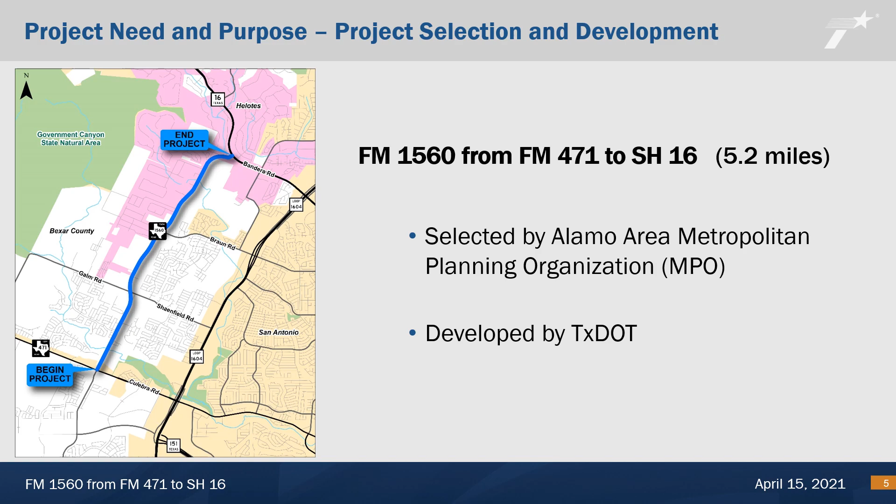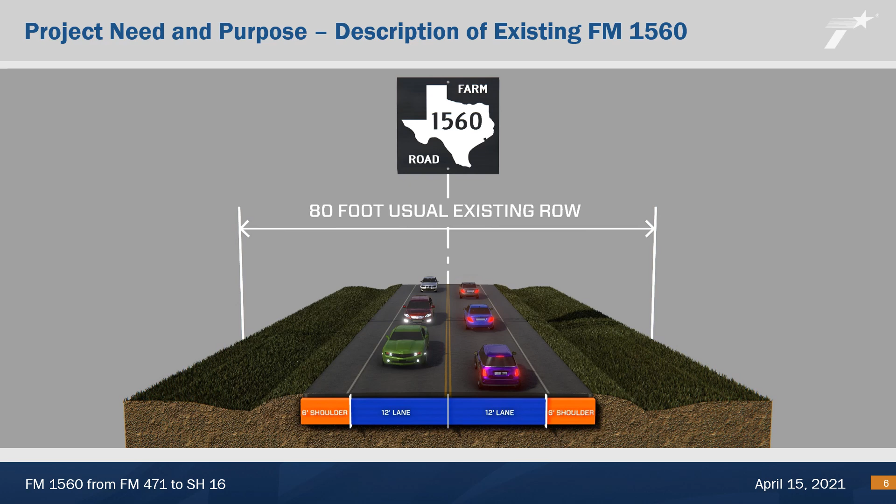This typical section illustrates FM 1560 as it exists today. FM 1560 is typically a two-lane roadway with shoulders. In some areas, the shoulders have been reduced to accommodate turn lanes as traffic demands on the corridor have grown over time. There are no bike lanes, curbs, or sidewalks along FM 1560. There are ditches on the side of the road that carry runoff from the roadway and adjacent properties. These roadway features are located in a state-owned right-of-way that is typically 80 feet wide.

TxDOT calculated the ability of FM 1560 in its current two-lane layout to handle traffic flow based on the traffic volume measured in 2017 and the projected future 2043 traffic volume. The results are presented in terms of level of service and average travel time. Based on 2017 traffic volume of 13,966 vehicles per day, FM 1560 operates at a level of service C, and the time to travel from one end of the corridor to the other averages 9 minutes. Level of service C is an acceptable level of performance. Overall, the roadway performs well at the 2017 traffic volume.

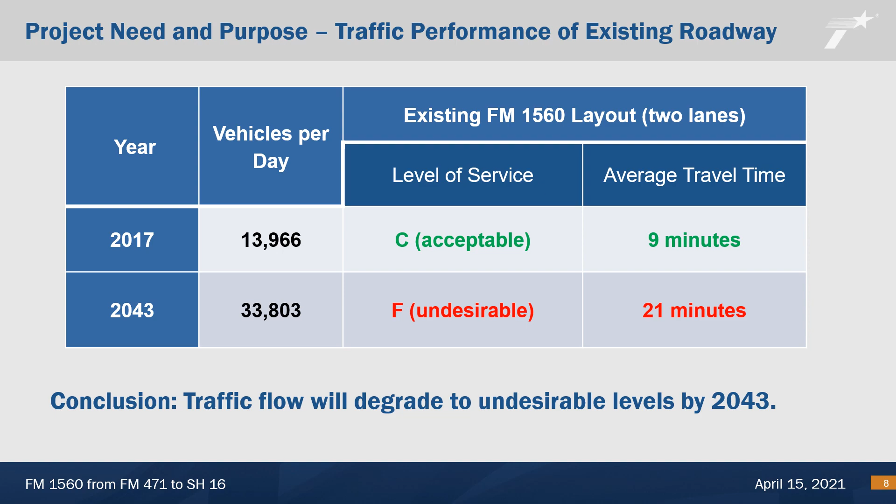FM 1560 was constructed in the 1960s as a farm-to-market road when there was very little development in the watersheds. It crosses the 100-year floodplain in several areas as shown on this map. There are even more locations where the roadway is overtopped, or in other words, flooded, during smaller, more frequent storm events. Where this occurs, the roadway is impassable and a concern for safety. Several warning signs and flood gauges are located on FM 1560.

The purpose of the project is to accommodate projected traffic volumes on FM 1560 from FM 471 to SH 16 at acceptable levels of service and to improve drainage to current design standards to reduce the frequency and magnitude of floodwater overtopping the roadway. In the course of addressing these needs, the project would be designed to accommodate bicyclists and pedestrians and include appropriate mitigation for environmental impacts.

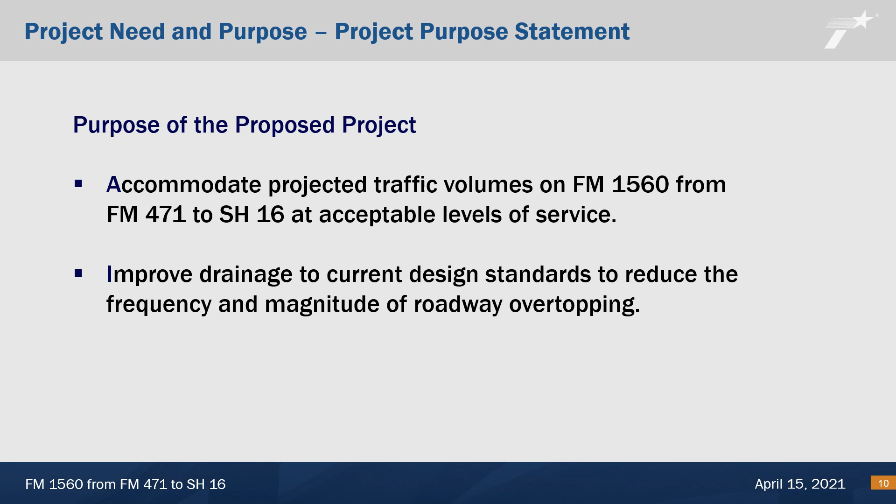TxDOT hired the engineering firm Jones & Carter to develop a project to address traffic and drainage needs, including appropriate public involvement and related environmental compliance studies. Together, we developed a preliminary schematic to address the need and purpose of the project.

TxDOT met with affected property owners, local government officials, and hosted an open house for the general public in January 2019. Based on feedback from these meetings, we revised the schematic and right-of-way needs and coordinated with affected property owners and stakeholders regarding the new design. The resulting schematic is presented in this public hearing for public review and comment. This section of the presentation describes the project with information such as roadway modifications, right-of-way requirements, schedule, and cost.

This typical section illustrates the proposed project, which would expand FM 1560 to 4 lanes, bike lanes, curbs, and sidewalks. The lanes would be typically 12 feet wide. The bike lanes and sidewalks would be typically 5 feet wide and 6 feet wide, respectively. The opposing lanes would be separated by a center two-way left turn lane as shown here, except in proximity to some intersections where a raised median would be used to divide the traffic.

Traffic signals would be maintained at the intersections of FM 471, Galm, Shaenfield, and Braun Road. New signals would be added at Sawyer Valley Drive, and the signals located at Iron Horse Way would be moved to Antonio Drive. The typical proposed right-of-way width is 120 feet. Approximately 36 acres of right-of-way would be acquired to accommodate the proposed improvements. This would expand the state right-of-way from its usual width of 80 feet to 120 feet. The existing and proposed right-of-way lines are shown on the schematic, along with the proposed roadway improvements.

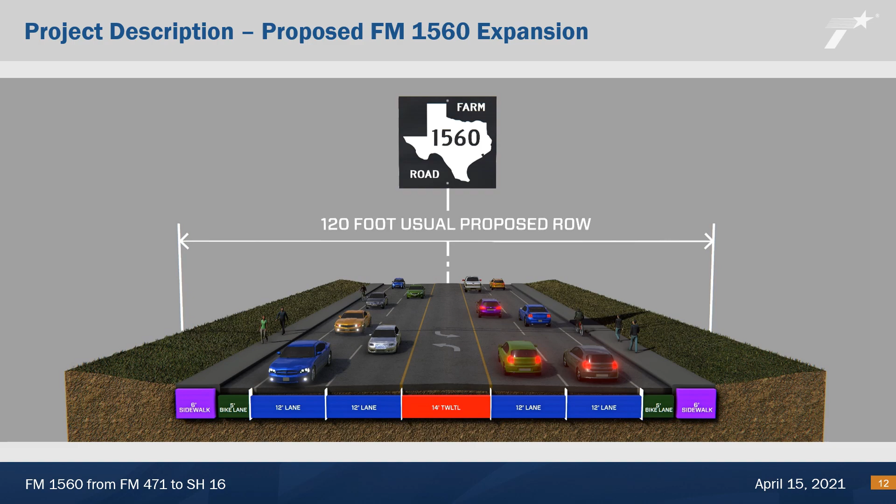The schematic is a detailed representation of the proposed roadway improvements and right-of-way requirements. This image shows the schematic. Since the project is over 5 miles long, it is not practical to show the entire schematic at a reasonable scale in the presentation. We encourage you to view and download the schematic from TxDOT's website at www.txdot.gov. Keyword search FM 1560 from FM 471. The next 2 slides are going to focus on the 2 areas shown in red.

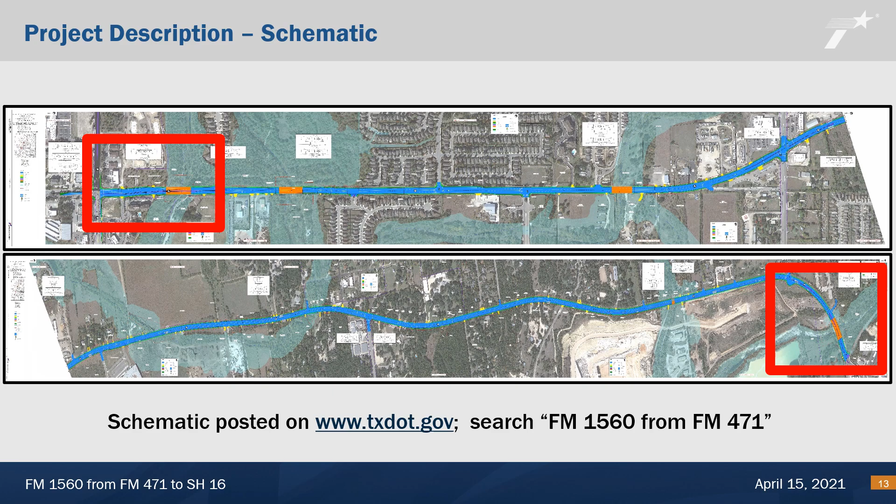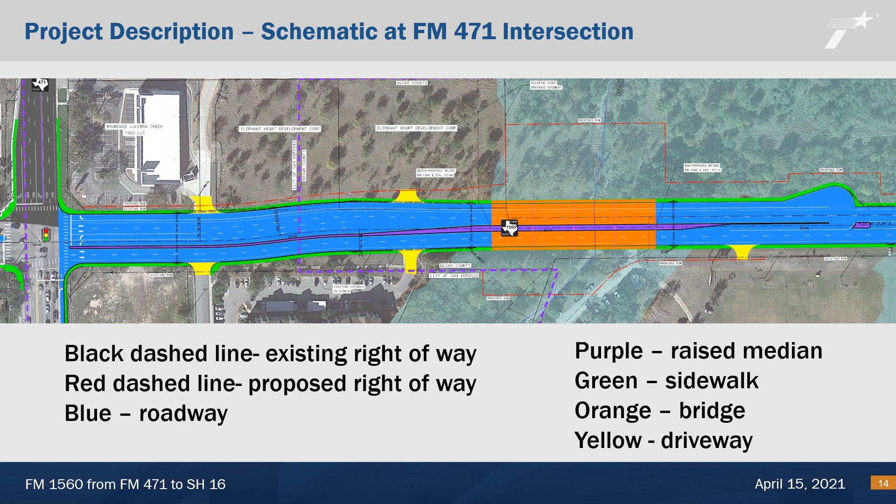layout. Raised medians proposed in this area would prevent left turns from Riggs Road and Iron Horse Way onto FM 1560 and preclude traffic from making U-turns in the curve of FM 1560. The traffic signal at Iron Horse Way would be removed and replaced with a new signal at Antonio Drive, where the traffic signal and loon can accommodate turnaround traffic. The intersections with Antonio Drive and Iron Horse Way would be realigned.

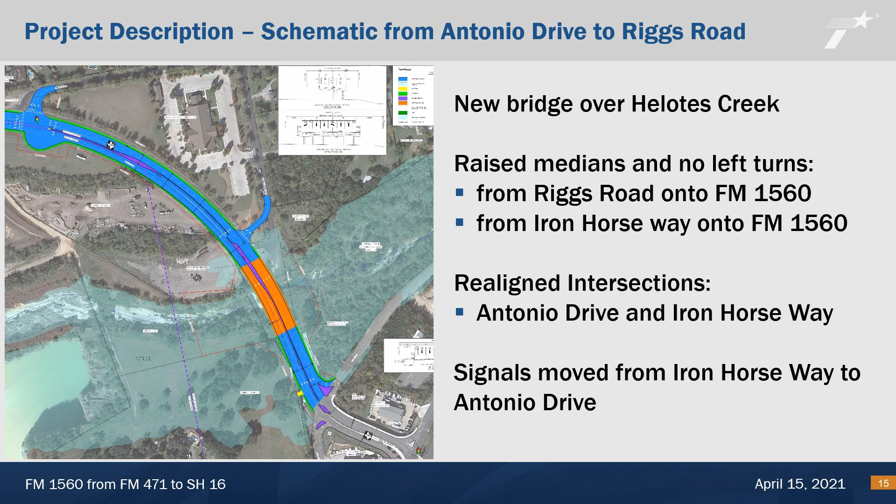Although the schematic shows more detail, we have also prepared a flyover simulation of FM 1560 showing the proposed expansion in video format. This video is posted on TxDOT's webpage for the project and can be accessed using these directions.

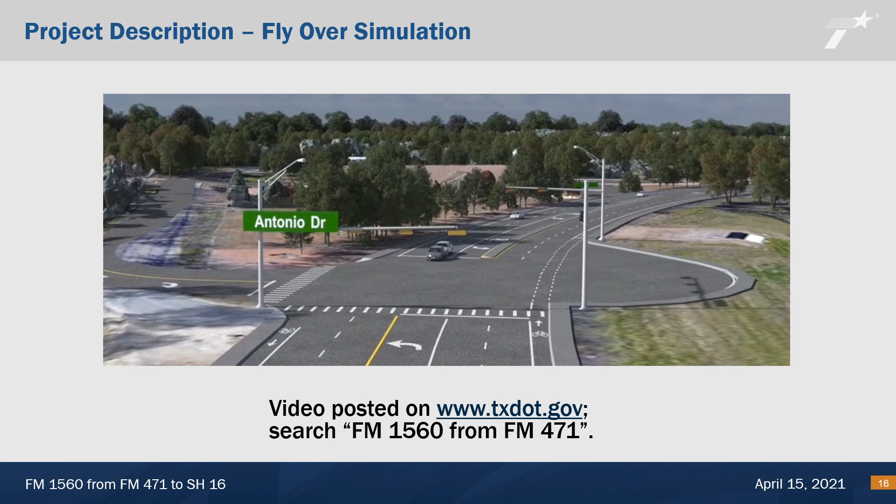TxDOT calculated the ability of the proposed expansion of FM 1560 to handle traffic flow under 2043 traffic volumes. If the roadway is expanded as proposed, it is expected to operate at level of service C in 2043, and the travel time from one end of the corridor to the other averages 12 minutes. These results indicate that the proposed improvements would satisfy the need and purpose of the project.

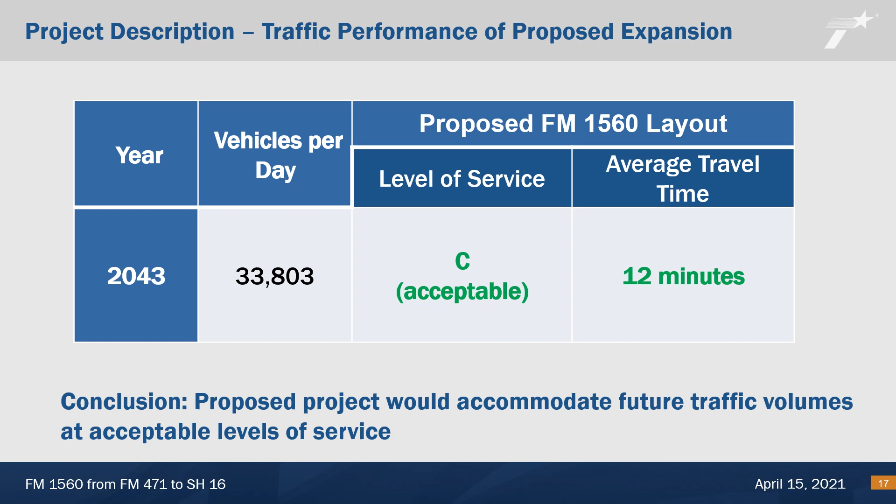This project was designed so that the roadway would remain open at a minimum during a 10-year storm event. This would substantially reduce the frequency or magnitude of overtopping along the corridor, which satisfies the need and purpose of the project. The project would include numerous design elements to improve drainage.

The majority of culverts and bridges on FM 1560 would be replaced, typically with larger structures. This includes new bridges at Culebra Creek and Helotes Creek, and culverts in overflow sections where there are currently no structures at all. The project would also include underground storm sewer and underground water treatment controls to remove pollutants from runoff to protect the Edwards Aquifer.

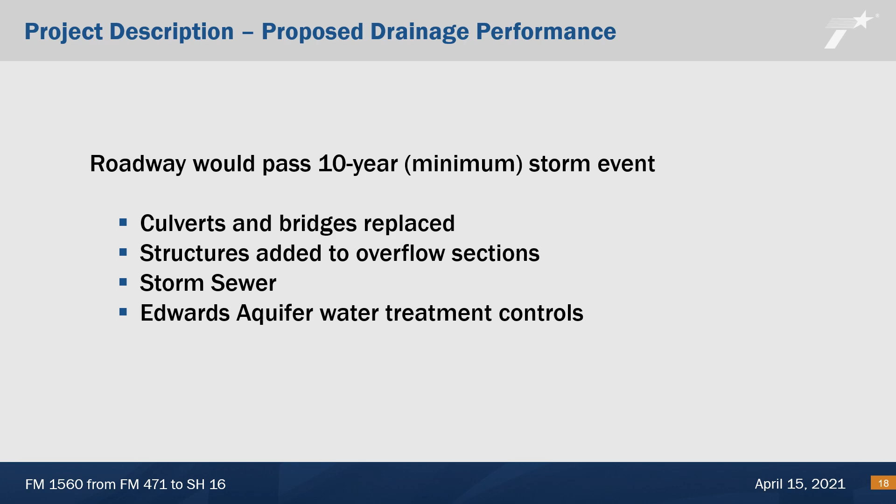The project would be constructed in phases in accordance with the Metropolitan Transportation Plan and the Transportation Improvement Program. Phase 1, which includes FM 1560 from FM 471 to Galm-Shaenfield, is currently planned for construction in 2022. Phase 2 from Galm-Shaenfield to SH 16 is planned for construction in 2023. The total project cost is estimated at $62,600,000, which would include federal and state transportation funds.

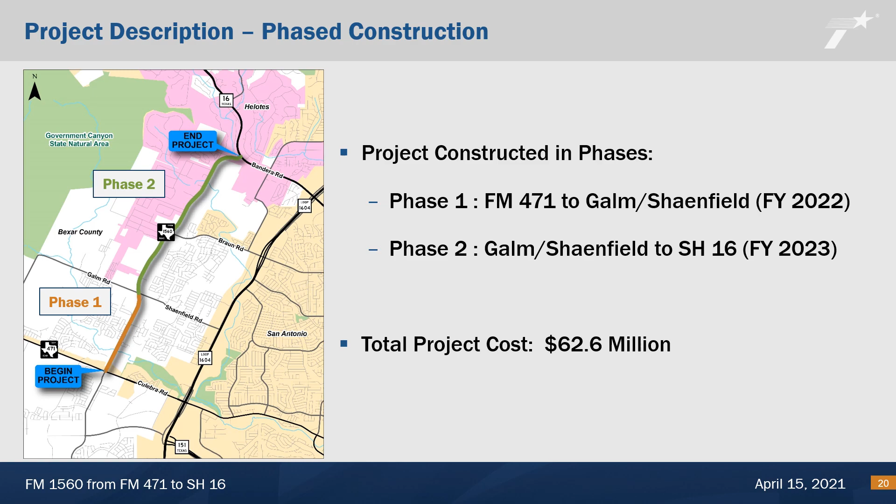The project would require the acquisition of approximately 36 acres of land from 89 parcels as shown on the schematic. We do not anticipate that any homes or businesses would be displaced by the project. On the schematic, existing right-of-way lines are shown by black dashed lines, and proposed right-of-way lines are shown by red dashed lines. If you review the schematic and see red dashed lines on your property like those shown on this image, then we are proposing to acquire right-of-way from you.

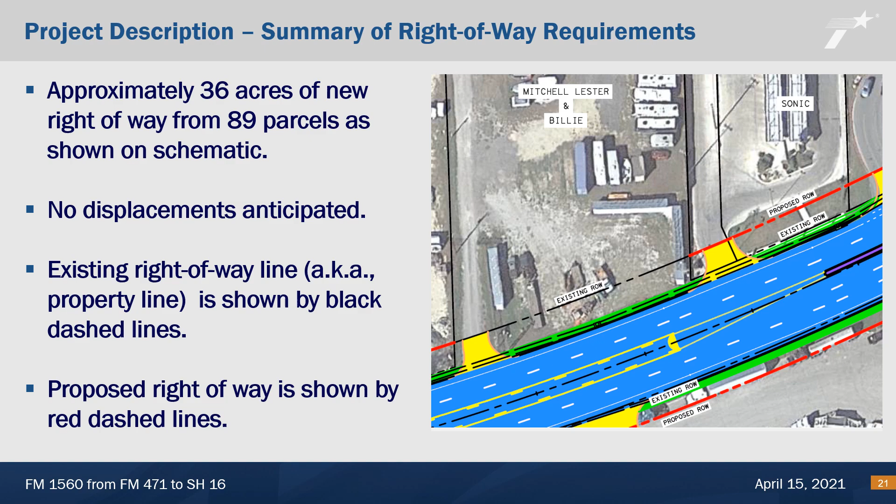If the schematic indicates we are proposing to acquire right-of-way from you, we recommend that you do not move any personal property, such as fences, until our TxDOT right-of-way agents contact you to formally begin the right-of-way acquisition process. We have made efforts to contact all the affected property owners, and we have met with many of them. If anyone has questions about the proposed right-of-way, please contact us. Our contact information is shown at the end of this presentation.